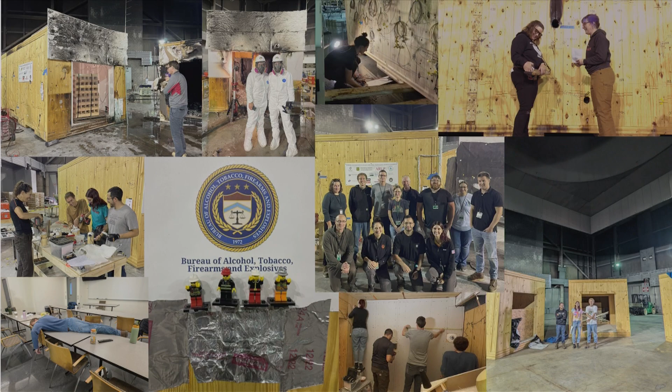So today, what I'm going to do is cover a slew of motivations for this research. How did we get here? Why are we burning these timber compartments down? And what are we trying to learn from there, and what is there to learn in the future? I'm going to talk a little bit about what we know so far in the fire field and how we can build upon that, decades and a century worth of research. And then I'll wrap up with what we did specifically, what we were testing, what we have learned so far, and what we're going to be doing in the future.

And really what the benefits come down to is that a lot of the fabrication for these structural systems, the glulam beams and columns and the cross-laminated timber floors, a lot of this is done off-site. So the fabrication, the milling, all of the cutting for the connections can be done in a shop. And what that does is it removes the work from being done on site. There's no welding, there's no pouring of concrete. And so that expedites the construction process. We're able to build these buildings a little bit faster than we can with steel and concrete.

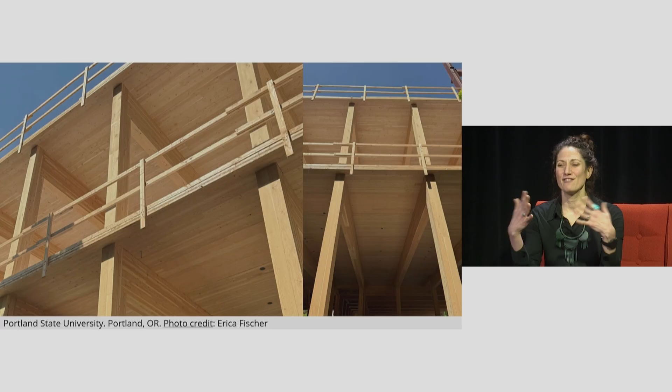While that's great, time is always money. What that comes down to is the building can open faster, we can get rentable occupants in the spaces faster, and the building owner can make money faster. So while we have all these incredible other benefits, it really comes down to the economics.

Mass timber is also a lighter weight material than steel or concrete, so we're able to use smaller foundations for mass timber buildings. We also live in a high seismic region here in the Pacific Northwest, and our earthquake demands are proportional to the weight of our building. So if we have a smaller weight building, we can save cost on our lateral force resisting system. We're able to save costs on speed of construction, size of foundations, and the lateral force resisting system, and build these buildings a lot faster.

This lecture series is all about climate, and we know that using these natural materials is really beneficial to the climate when we look at the full life cycle assessment of these buildings. So we can layer that on top as another benefit for this material.

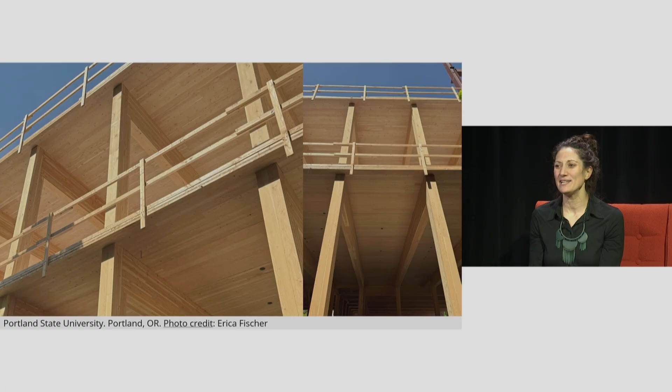With all of that, these materials are really primed to solve some of our major problems in the United States, particularly with housing shortage. We can get these buildings built faster. Everyone wants to be inside of the building with the exposed timber, it's a really great feeling. If you're on campus, you can go over to Peavy Hall and take a look and feel all the biophilia in the building. So there are opportunities to really solve some of our major building problems in the United States.

We can also use advanced manufacturing techniques and robotics to fabricate these members. We're already doing that over in the Emmerson lab here on Oregon State University's campus, using a ton of robotics to precision fabricate a lot of the connections and members, so we don't have to do that work on site and can have less waste in our construction process.

So all of these are amazing benefits, right? It definitely shows that timber and mass timber in general is a viable building product. But we do live in the Pacific Northwest, so a lot of us have gone camping. We know that timber burns for a long period of time. It's a really great fuel. That's why we've used it for centuries.

So what happens when there is a fire within this building? How can we build fire-safe mass timber buildings? How can we have it all exposed, enjoy the Portland International Airport, enjoy these buildings that are cropping up around our state, but also know that if there was a fire, we would be safe? That's what I'm going to talk about today. That's a big challenge that we're trying to solve in our research group.

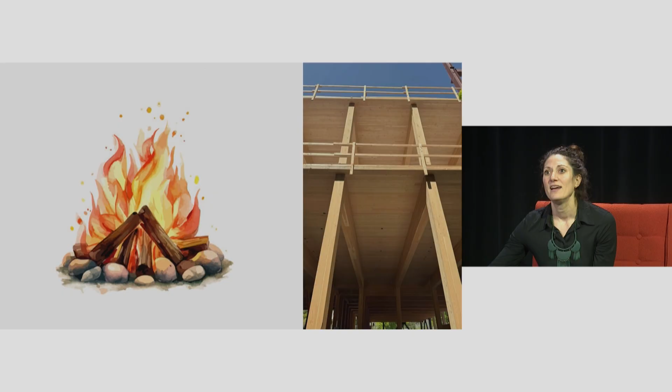So to get into how we're solving this and why, I'm going to first give you a little bit of a fire 101. There are a few different stages of fire, and fire can be characterized by the amount of energy being released, the heat release rate, which I'll talk about later when we discuss the results of our tests. It can also be talked about in terms of gas temperature, the air temperature during the fire.

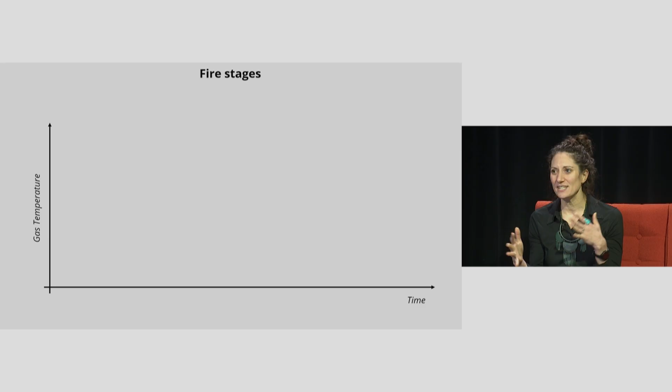So we are all sitting in some sort of office or home, some sort of room. If we decided to take a match and throw it into one of our garbage cans - please don't actually do this, just imagine it - the contents of the garbage can would start to ignite. That ignition might grow, and that fire would then ignite other things in the room, such as the carpet or the curtains or other nearby furniture. As that fire grows, we would have both burning fuel and unburnt fuel in the space.

We would start to develop a smoke layer on top of the ceiling. We would have fresh air coming into the room, and the two would be mixing together. We call that the growth phase.

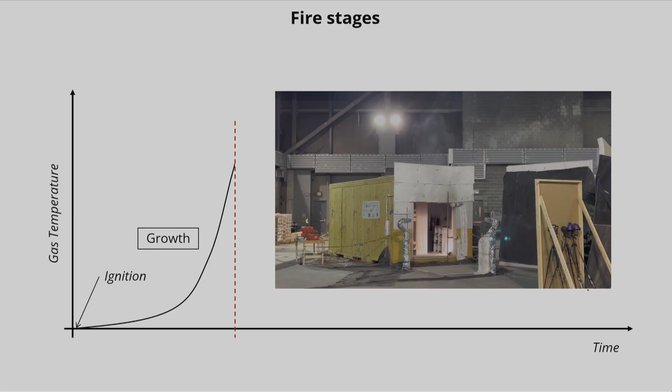And that growth phase can look like what I'm showing on the screen - this is from one of our tests. We can see some smoke coming out of the opening of the room. We can't see the fire itself, but we can begin to see what might happen there. The growth phase could also look like this on the screen, where we see more smoke coming out of this room, but not everything is on fire yet in this space.

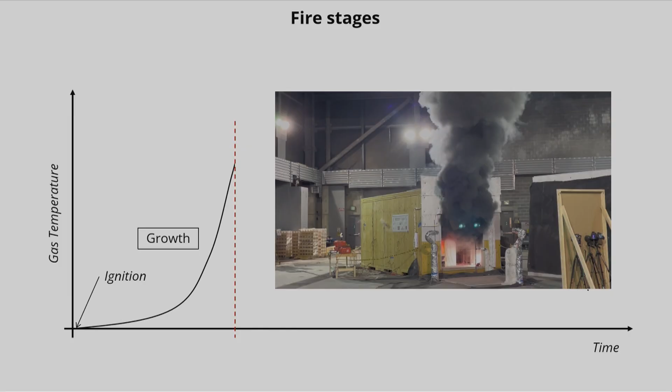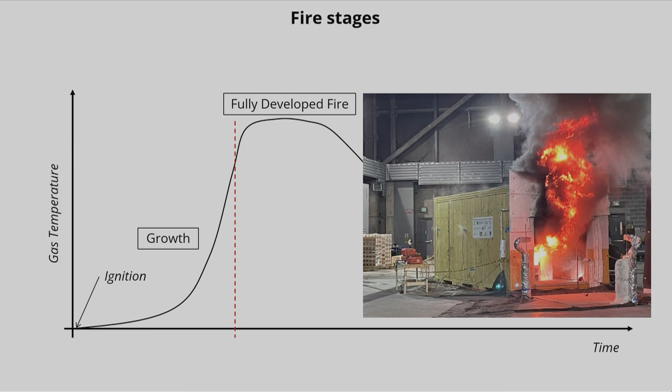After the growth phase, when everything in the room is on fire, when we have ignited all the fuel in the room, we call that a fully developed fire. That might look like something like this, where we have flames actually coming out of the room. We see that almost everything in the room has combusted or is actively combusting.

Before that fully developed fire, we call that pre-flashover, and after it, we call that post-flashover. The research that I do is really in that post-flashover phase. We are not looking at evacuation of occupants, and we're not looking at the effectiveness of sprinklers on the fire itself. Those are not factors to consider in a post-flashover environment, because it's not suitable for humans to survive, evacuation needed to already take place, and sprinklers are not going to be able to help you in a post-flashover environment.

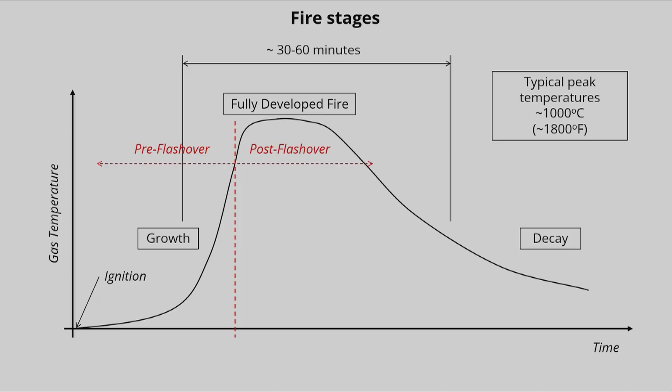That's the different phases of the fire, but we have to also realize that at some point the fuel will be consumed or the oxygen will be consumed. So we go back to our Scout days, thinking about the combustion triangle: we need ignition, we need oxygen, we need fuel. If we don't have all three, we don't have combustion. So when we lose that ventilation or we lose that fuel, we hit the decay phase of the fire. The temperatures begin to decrease, the energy in the room begins to decrease, and our hope is that we're able to maintain the stability of the building throughout this entire curve, and maintain our compartmentation.

I'm sitting here in a room with Charlotte and some other people. If there was a fire in this room, we hope that none of the walls would fall down so that the fire would spread across the fourth floor, and we hope that the floor wouldn't collapse so that the fire would spread downward through the building. We maintain the fire in that space because eventually the fuel will run out, the ventilation will run out, and we hit that decay phase and the fire is over.

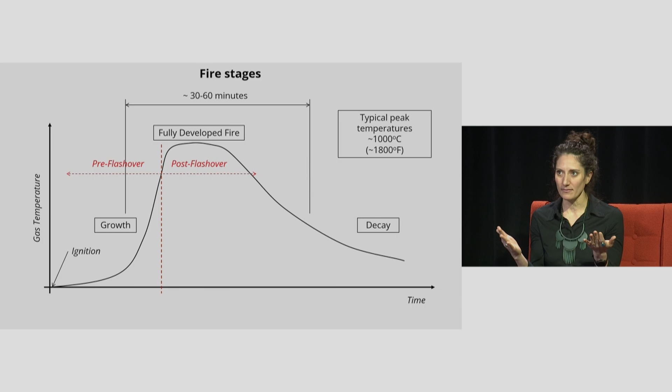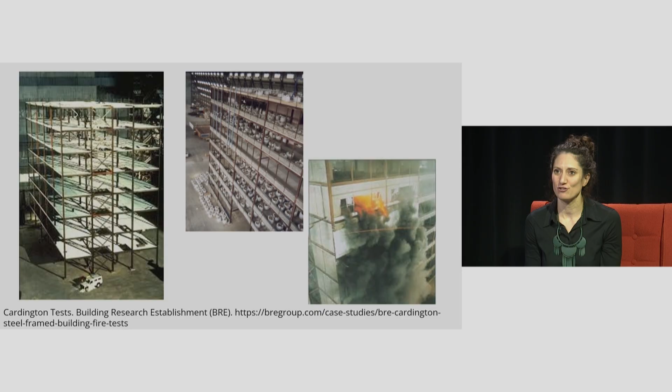So much of the knowledge that we know about fire in buildings is about a century old. At the end of the 90s in the UK, the Building Research Establishment built a eight-story steel frame structure in the middle of a big airport hangar. They put known fuel in various areas of the building, built out the compartments in different areas, and lit them on fire.

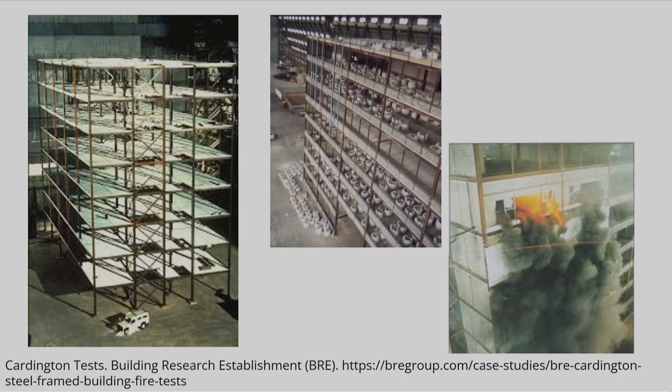That enabled us to quantify the fuel within the space, measure the fire demand that resulted within that space, and hone in our tools to be able to quantify what the fire might be in different types of rooms with different types of ventilation and different types of fuel.

It also enabled the research community to really understand the structural response to those fires. We learned and got to quantify the large plastic deformations that we saw in steel beams and girders, as you can see on the lower right. That showed us there was membrane action of the slab, that this was a two-way problem, a three-dimensional problem, such that the entire structure was involved in maintaining that stability during the fire.

We saw that there might be some damage in the connections, such as local buckling or bolt fractures, but we didn't really see collapse or failure. That showed us the robustness that the steel frame building really had.

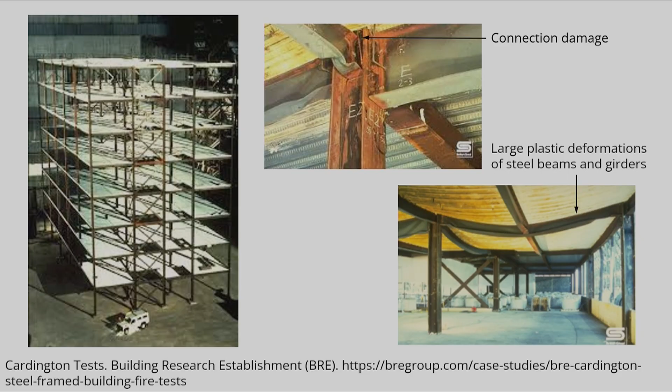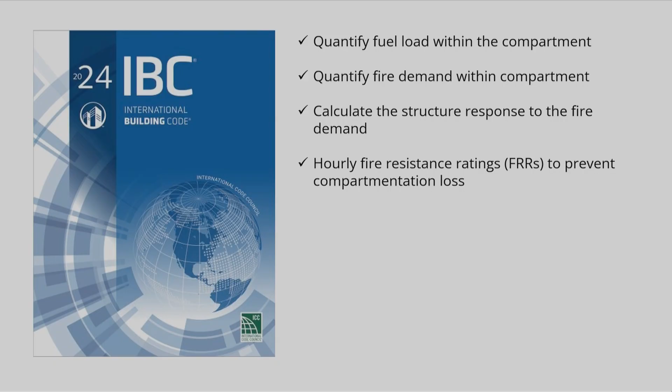So researchers were able to quantify the fire demand in the space, then perform heat transfer analysis and understand through sensors and numerical modeling the thermal distributions through the members, and then use those temperatures to understand structural performance. A lot of that fed into us feeling okay with the hourly fire resistance ratings within the International Building Code, and it also enabled us to pull together a performance-based design code for fire.

The work out of the Cardington test inspired research all through the early 2000s, including my own PhD research, which was stimulated after the collapse of the World Trade Centers. Between that research in the United States and the Cardington research in Europe, we were able to pull together and really understand the performance of steel frame structures in fire, and be able to perform that performance-based design.

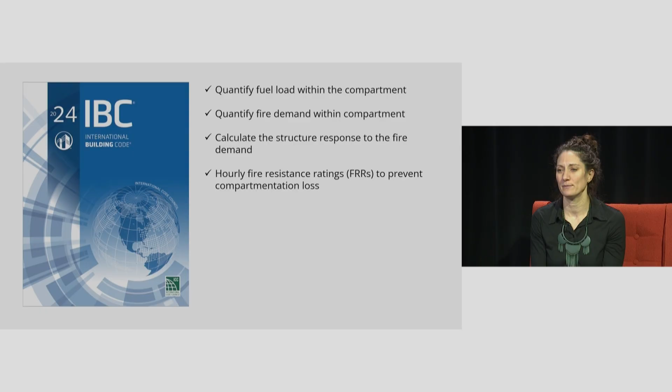But this is all for non-combustible components. Now let's go back to our Portland International Airport. This is not non-combustible components, this is combustible. So what happens now in a space where we have combustible building components? Can we take the decades and a century worth of knowledge on fire behavior and just apply it to this space? Or do we need to tweak and understand the knowledge we already have to adapt it to consider the combustibility of the timber in this space?

One thing that we learned from the Cardington test and from decades of research before and after is that steel wants to expand during the heating phase of the fire and contract during the cooling phase. It can't actually do that in buildings.

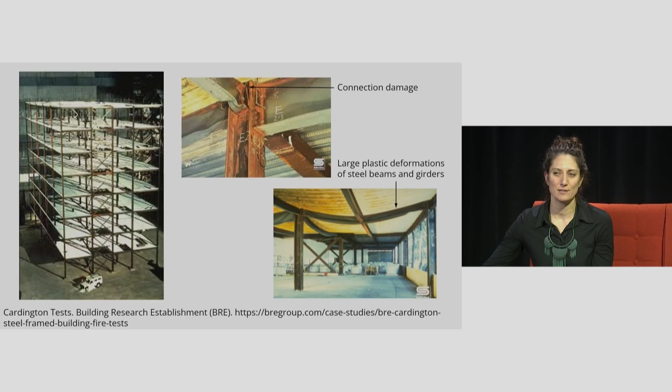That's why you see all of that local buckling, because of that restraint you have thermally induced forces in our steel framed structures, but we don't have that in timber. Timber doesn't want to expand during a fire or contract during cooling. Rather, the timber is charring during the fire. Very quickly we'll see a char layer form on the outer surface of that timber, but it's not just about the charring.

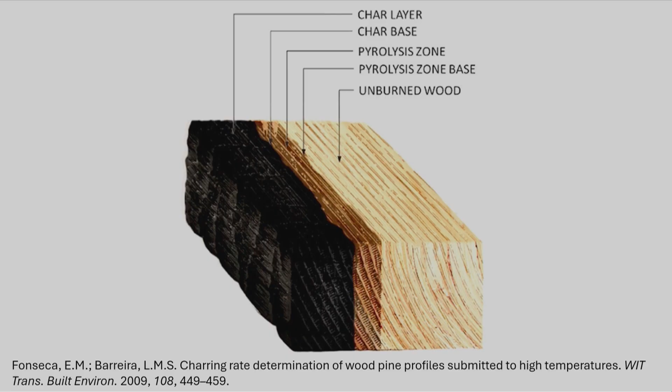Beyond that charring, in that brown zone you'll see on the screen, it's what we call the pyrolysis zone - we have what's called a heat affected area. When the timber is between around 50 and 300 degrees Celsius, its thermal and mechanical properties are degrading quite quickly with temperature. So we need to account for that when modeling this structurally in a building. We have our char layer, we have an area beyond that char that has heated up, and this is all happening as a function of time throughout the fire duration.

Let's go back to our compartment. In a pre-flashover phase - I explained this a little already, but the picture helps - when we have this burning fuel, it's having a heat transfer reaction with the smoke layer, but also with the unburnt fuel. You'll have some radiative heat transfer between the burning fuel and the unburnt fuel, and some convection and mixing between the fresh air coming into the compartment and that smoke layer up there.

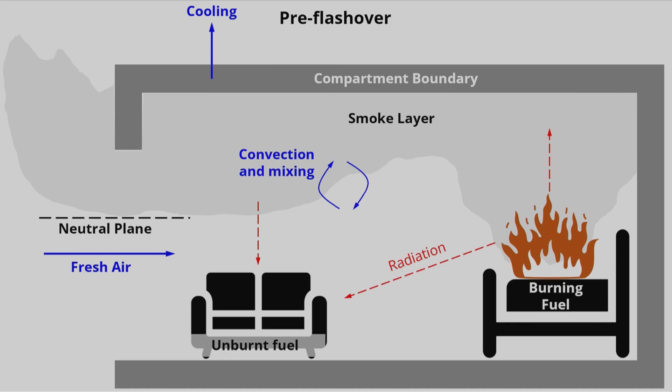We're also going to have thermal gradients throughout our compartment boundary, where the part not in contact with the fire, the outer part, is much cooler than the inside. Equilibrium is trying to be met, so the heat keeps going through the compartment boundary - we call that a thermal wave. In our post-flashover environment, we're going to have flames spilling out of the compartment. We have less fresh air coming in because the smoke layer is descending, but we'll still have heat flux coming down from our smoke layer to our burning fuel.

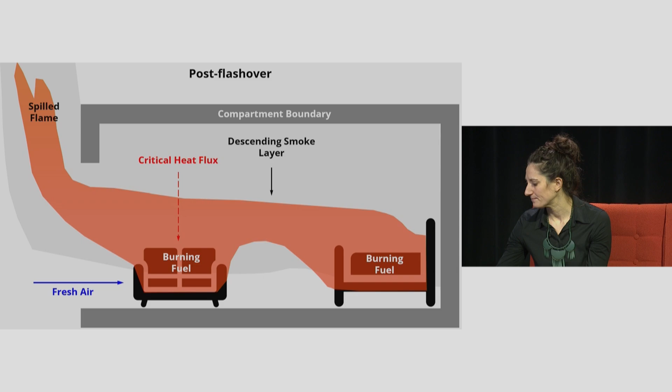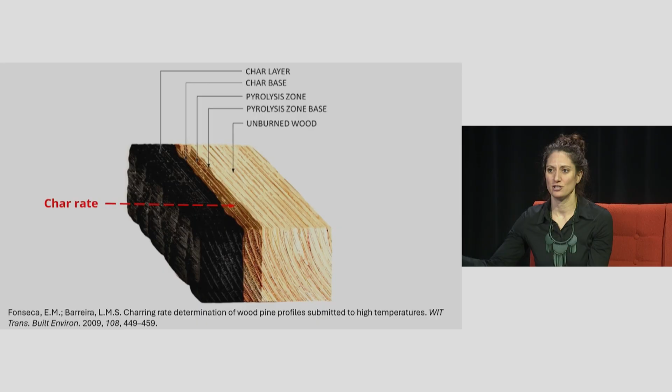If we look at what's happening in the compartment boundary, this is exactly what's happening, except we're going to be charring the timber as it goes through - but this is not going to be linear. Timber chars, and that char layer is actually a really great thermal insulator for the uncharred wood, so as the char propagates through the uncharred wood, it's not doing so in a linear manner.

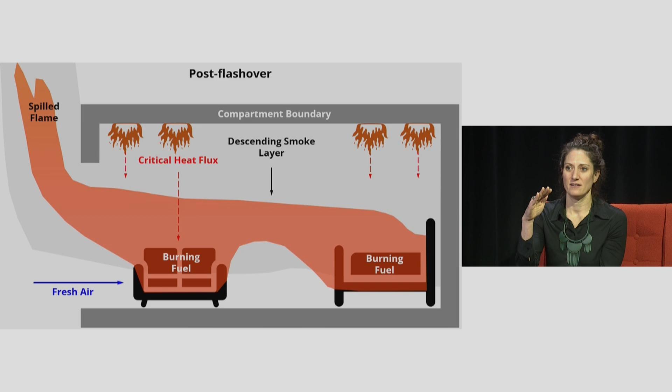Now if that compartment boundary is timber and exposed, meaning it doesn't have gypsum wallboard or other fire protection, that timber will ignite and also contribute to the fire itself. That timber will be considered part of that burning fuel, and there will be radiative heat transfer reactions between the burning fuel and the compartment boundary that is on fire - we call that irradiation. So the two will cause the temperatures in the compartment to rise.

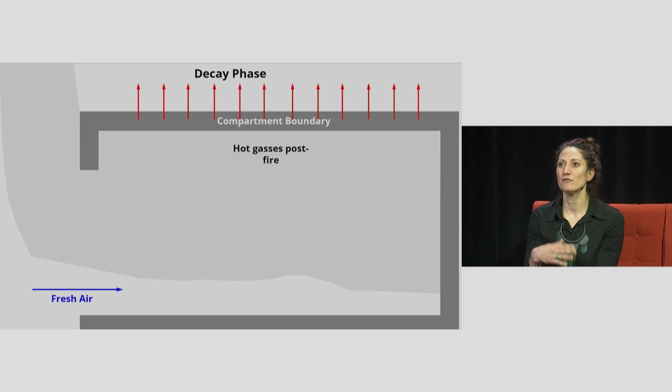So we know what happens during the pre-flashover and post-flashover phases, but the decay phase is really critical because that thermal wave is continuing to go through the compartment boundary. Some researchers say the timber might continue to char during the decay phase, and that might be true. But more importantly, the timber will continue to increase in temperature, resulting in degrading material properties and degrading structural capacity. So as the fire decays and gas temperatures decrease, we are still heating up portions of the timber in the compartment boundary and reducing its mechanical properties.

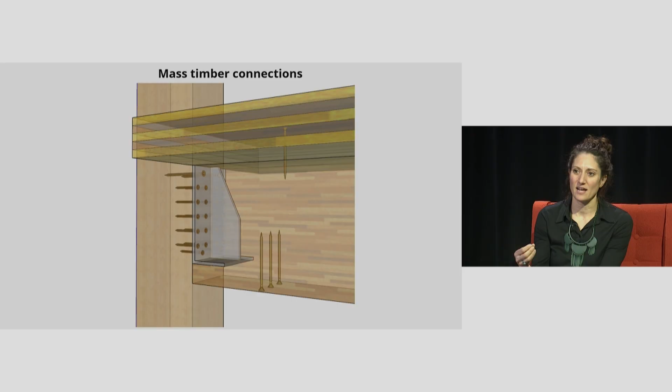Now, this will be one of my only mentions of mass timber connections, but all of this becomes even more complicated when we talk about mass timber connections because we are mixing the materials together. We're performing heat transfer not just through the timber itself, but through steel into timber. There's an opportunity to conduct heat up into the timber through those screws - not all the way through the depth of the screw, but definitely along the screw itself. In addition, we're exposing multiple edges of the timber to the fire, and each side will char at a different rate.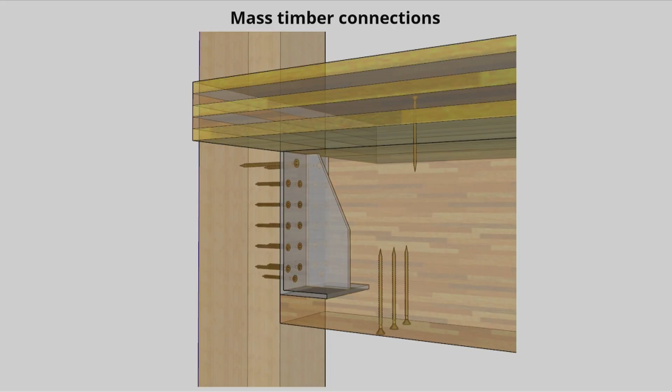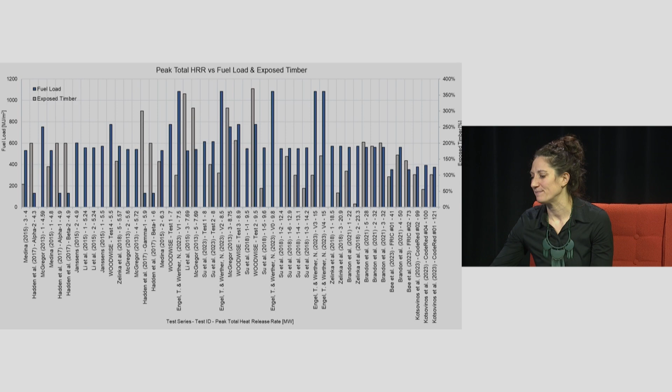Okay, so now that you are all experts in fire dynamics and you understand why we're doing what we're doing and all of the complexities of this problem, let's talk about what problem we specifically are trying to solve in our research. So we did a number of compartment fire tests at the Alcohol, Tobacco, and Firearms Laboratory.

And what I'm putting here is almost all the other engineers and scientists around the world who have also performed these tests. Our tests are sprinkled throughout here. The left side of the y-axis is the fuel load, and the right side of the y-axis is the exposed timber as a percentage of the floor area.

And what I'm trying to show you here is that a lot of the tests fall into a very singular bar that kind of are below that 600 megajoules per meter squared. Not a lot of tests have a lot of exposed timber above 200% of the floor area, and not a lot of tests use large amounts of fuel load.

And the reason that's important is going back to our compartment fire figures. When you have exposed timber, you could be exacerbating the fire itself. And if you have a high fuel load, that could be even worse.

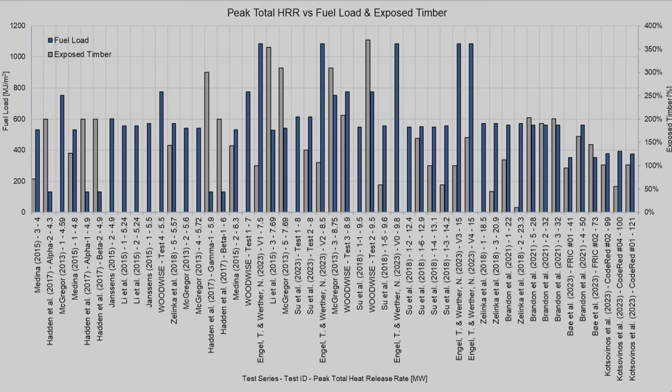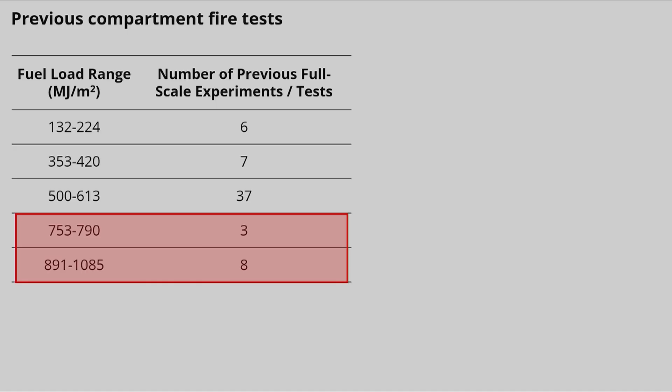So if we break this down into a table, what we see is that actually very few of these tests fall into that high fuel load area. And the majority of those tests, and almost all of those tests, don't use actual modern furniture.

And the reason for that is, modern furniture, when you burn, is expensive. But the result is that the dynamics of the fire itself may not represent what might occur in real buildings today. By using wood as proxies for furniture, we are changing the composition of our fuel.

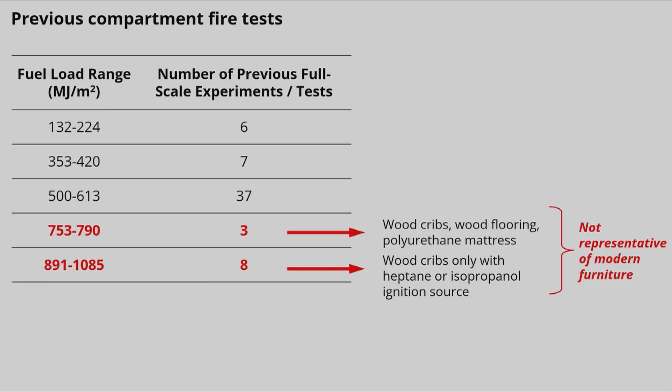We're substituting cellulose-based fuel for synthetic fuel. Wood burns very slowly, for a very long time, versus the type of chair I'm sitting on right now, which might ignite very quickly and not burn for very long. It might be completely burned in a short period of time.

And if we extrapolate that to an entire room or entire building filled with furniture, that would change the dynamics of the fire quite a bit.

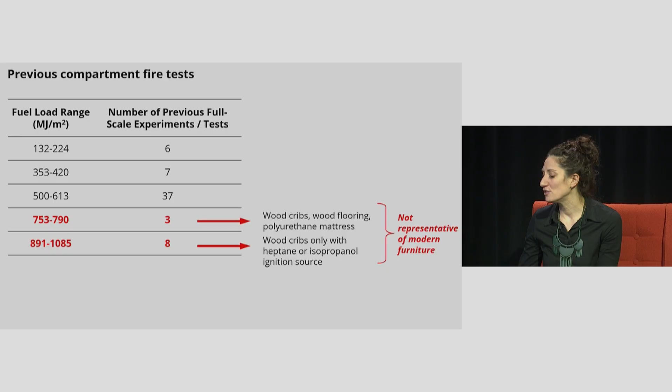So what we aim to do is really get at how do we holistically evaluate mass timber buildings in fire, considering all of the performance objectives that we need to put onto our buildings, which is becoming more and more every day. It's really hard to juggle these performance objectives.

But in order to get to fire-safe mass timber buildings, we need to be able to actually quantify and calculate the fire demand that is within these buildings. That's going to depend on our building occupancy, the geometry of our compartment or our rooms, and it's going to 100% depend on our fuel characteristics and the thermal properties within the space.

When we can actually quantify what the fire hazard is in the space, we can then perform our heat transfer models. We can then understand how quickly we are charring the wood, how quickly we are moving that thermal wave through the timber, and then degrading those structural and material properties.

And relate that to our structural capacity in our structural model, so we're able to actually calculate what the structural capacity of our members and our building is during different fire scenarios. We have to first and foremost be able to quantify what that fire scenario is.

And then we can couple it with our sustainability and emissions practices. Typically, when we do a life cycle analysis of a building, we're looking at the global warming potential of the materials, or we're looking at the carbon content of the materials.

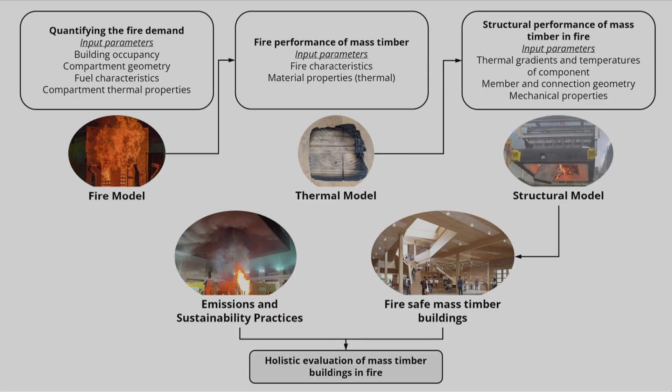It might off-gas, and it might emit worse products. We don't know. So we have to consider all of that within our holistic evaluation of our mass timber buildings to be able to make informed decisions about which way to go.

So with that, I'm going to talk about the bulk of what we did. We tested four compartments across three different buildings. Tests 1 and 4 consisted of the same building, and we fully encapsulated that building. Gypsum wallboard was on every single surface of the interior of the structure, so the timber was not damaged. Test 2 consisted of every surface being exposed.

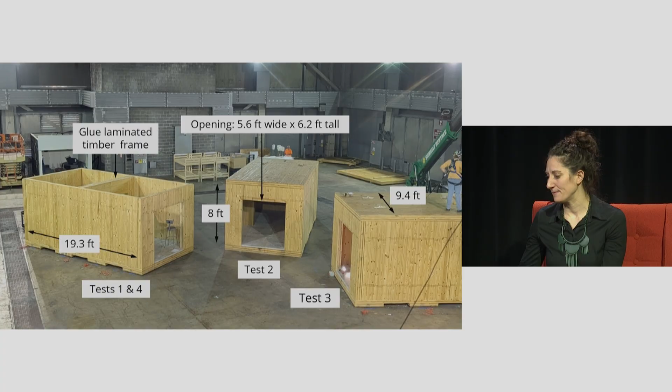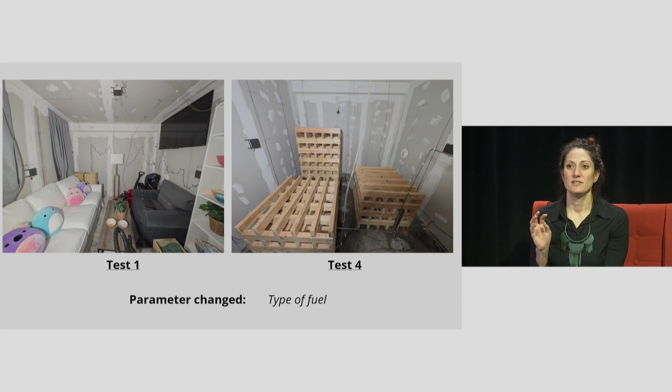Tests 1 and 4 were exactly the same. The only parameter that changed between these two is the fuel. We tested test number 1 with furniture and modern fuels. For test number 4, we used wooden cribs that would equate to the same fuel load, and we tried to place the wooden cribs in areas where we had the fuel in test number 1.

We didn't know how controversial the squishmallow burnings would be at the beginning of these tests, so I apologize to everyone with kids who is watching this at home.

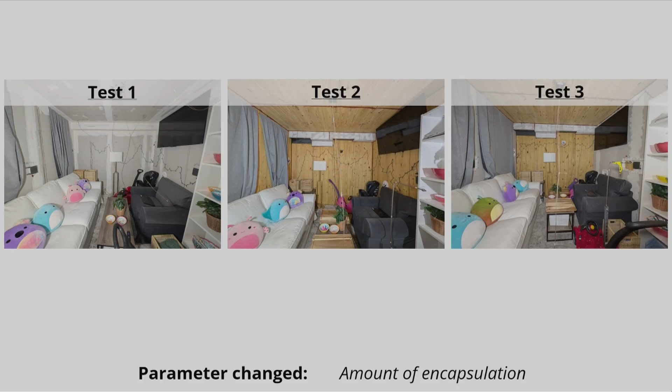For tests number 1, 2, and 3, those had the exact same furniture in every single test in the exact same location. The only thing that changed between tests 1, 2, and 3 was the amount of encapsulation. Test 1 on the left had full encapsulation, gypsum wallboard on every single surface. Test 2 had no encapsulation, and test 3 only had it on those long longitudinal walls.

Now you'll probably see something in the back corner between the back wall and the ceiling. Those are different connections that we tested within our compartment to look at how different connection configurations and the amount of fire protection on these connections might perform in a natural fire environment. I'm not going to talk about that today as there's not enough time to cover all of it.

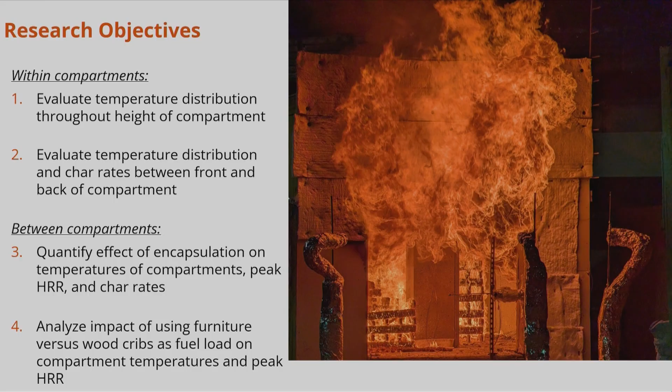So what were some of our research objectives? When we were looking within each compartment, we wanted to know what the temperature distribution was from floor to ceiling. Was it fairly uniform, or were there big differences in that vertical temperature distribution? We also wanted to know the temperature differences between the front and back of the compartment. We had that glulam frame in the middle of the compartment, and we were curious how that affected the fire itself.

When comparing between the compartments, we wanted to look at the effect of encapsulation on temperatures, on char rates, and on heat release rate, the energy being released by the fire. Lastly, we wanted to know the effect of using furniture versus wood cribs on all of these factors. There's a lot of research throughout the world using wood cribs, but our current furniture isn't really cellulose-based anymore, it's synthetic. So we wanted to test whether we could extrapolate results from those tests to modern fuel loads and fuel environments.

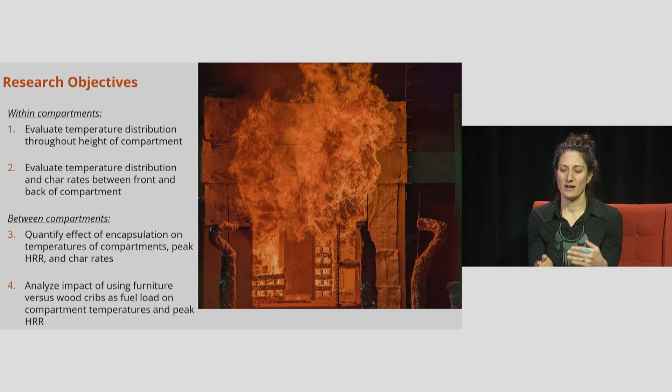We had about 800 instruments throughout the entire compartment, and there isn't enough time left in this lecture to go through all of it, so I'm just going to go through some of that here.

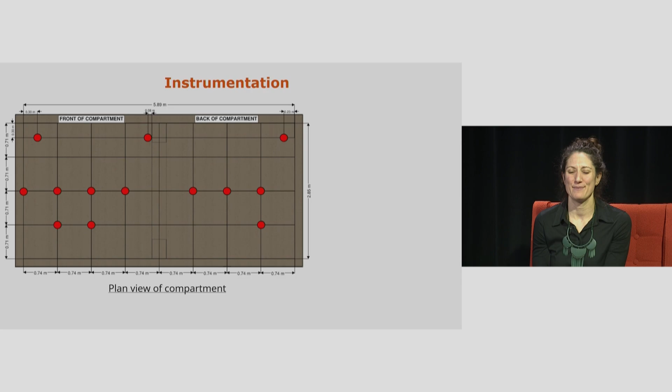All of these red dots represent a plan view of the compartment, showing what we call thermocouple trees. These are strings that we dropped from the ceiling to the floor, with thermocouples placed about 0.6 meters, or about 2 feet, apart from ceiling to floor. This allows us to collect a thermal distribution throughout the compartment, from front to back and from floor to ceiling.

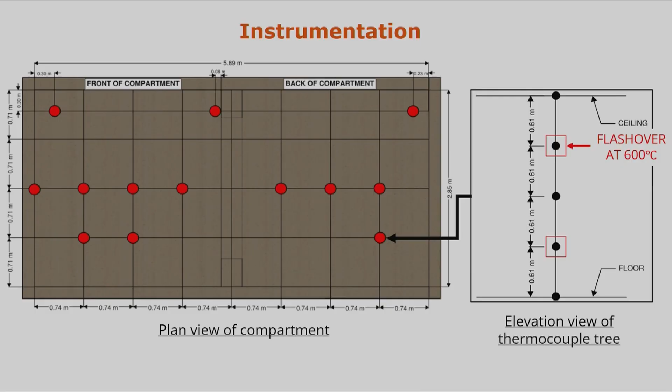We used the thermocouple that was 0.6 meters below the ceiling. When that thermocouple reached 600 degrees Celsius, we said that meant we had reached flashover. So we can actually quantify that flashover point to differentiate between pre-flashover and post-flashover.

All right, so we're ready for some results.

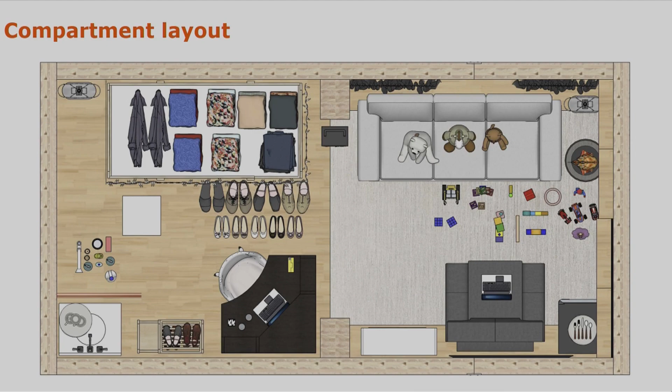In every single test, we put the ignition in this location: the back left corner of the compartment, in the couch. We ignited in the same way every single time, even with wood cribs.

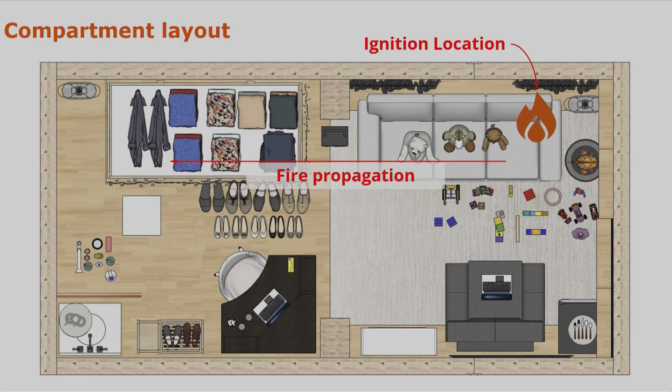The fire ended up spreading and igniting around the back of the compartment, and then it moved to the front, and then it moved back to the back. We know this because we had cameras in the space and could see it before the cameras burned. It's hard to do fire testing because of the harsh environment. We can also see this in our data, and I'm going to go through a bunch of it with you and show you exactly how. It really helps to pull the data all together.

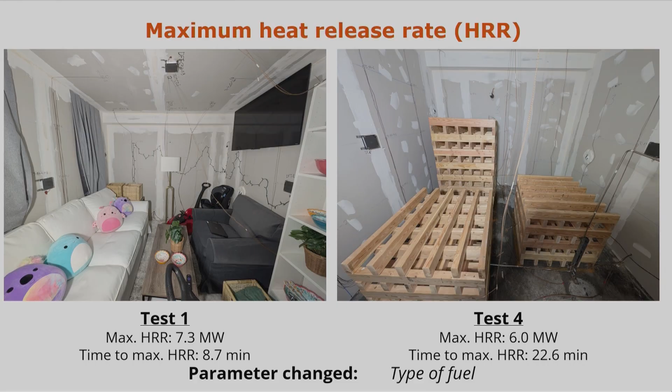If we compare test 1 to test 4, just in our maximum heat release rate, the maximum amount of energy being released by this fire, we can see that the maximum heat release rate decreased when we went from modern fuels to wood cribs. But more importantly, the time to that maximum heat release rate increased by about a factor of 3 when we went from modern fuels to wooden cribs. Wood burns for a really long time and burns slowly, and that was really reflected in our time to maximum heat release rate. We can see it show up in the data.

When we go from test 1 to test 2 to test 3, adding that encapsulation, we see that as we add more encapsulation, we increase our maximum heat release rate. When we go from test 1 to test 2, we actually decrease the time to the maximum heat release rate, so we get there very quickly. But more interestingly, when we add encapsulation on those longitudinal walls, we decrease our maximum heat release rate just a little bit because we're also decreasing the amount of fuel, but we get there faster, which is really interesting. That's going to come up in some of the other data we're going to look at.

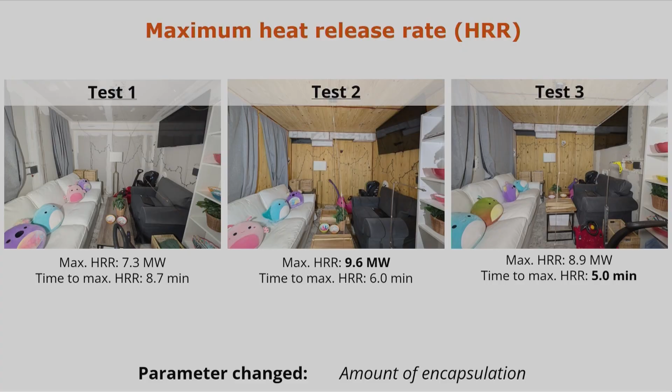So I'm about to show you some plots, don't be too overwhelmed, I'm going to walk you through them. What I'm showing here are temperatures. The gray is 0.6 meters below the ceiling, the hatching is 0.6 meters above the floor. On the left is test 1, on the right is test 4. Test 1 has furniture and modern fuels, test 4 has wood cribs. This is just for the front of the compartment. There's a little cartoon in the upper right-hand corner that tells us if we're looking at the front or the back. Right off the bat, in test number 1 we had a shorter time to flashover.

That kind of reflects our time to maximum heat release rate. The x-axes in these plots are different because we had to cut test 1 short, the encapsulation failed because of an installation snafu. The bigger difference is that the temperatures were actually a little bit higher in test 4 than in test 1. It took longer for test number 4 to reach its peak heat release rate, so it had more time in that burning and combustion phase leading to the peak, and that resulted in higher temperatures in the front of the compartment.

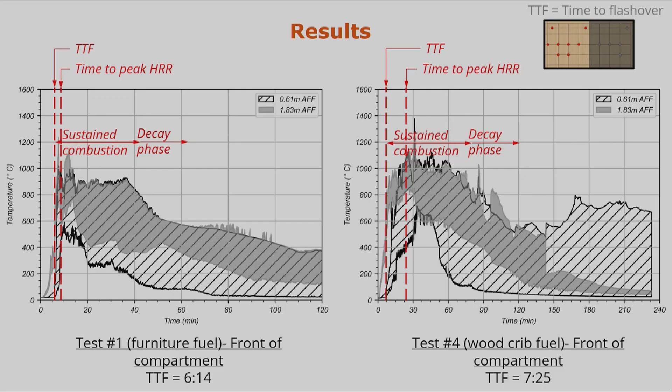Let's put some lines on here. What we can see is that our time to flashover and time to peak heat release rate are very close to one another in test number 1, followed by a decay phase. But in test number 4, we had more differentiation between our time to flashover and time to peak heat release rate, kind of a longer sustained combustion, and then we hit a decay phase. In the back of the compartment, the ignition is in the back of the compartment.

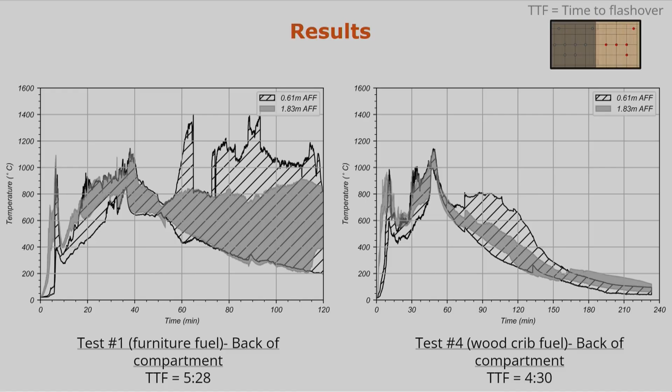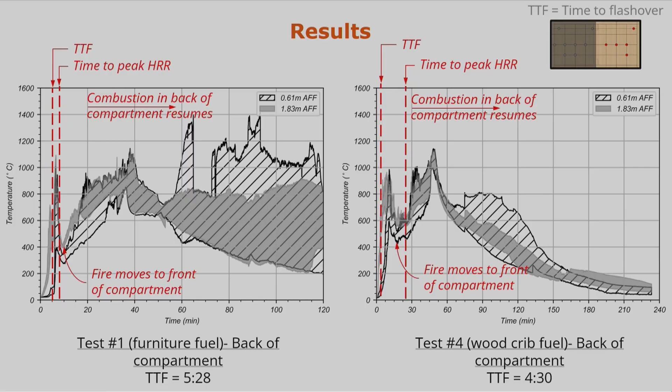Just as a reminder, we see these spikes followed by a decrease in temperature. We hit flashover, and then the fire actually moves to the front of the compartment, and combustion occurs there. Finally, there's enough oxygen for the back of the compartment to continue combustion, and the fire moves back and combusts there. So we can discern what's going on with the fire movement in the space from all of our data. However, in the back of the compartment, we actually see our time to flashover with the wood cribs as faster in test number 4 than test number 1, and that's the opposite in the front of the compartment.

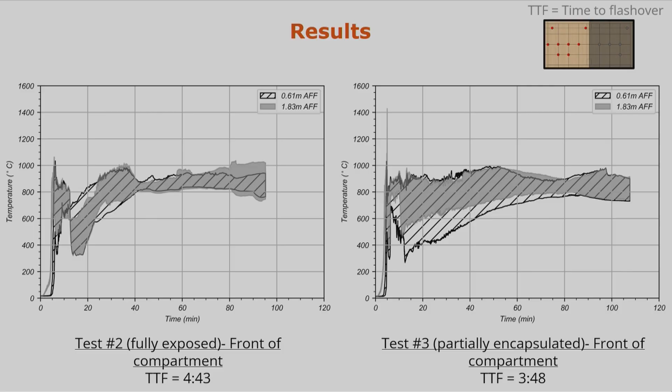So if we begin to compare test 2 and 3, as a reminder, both had modern fuels. Test number 2 was fully exposed, test number 3 was partially encapsulated. What we see is test number 3 has a faster time to flashover. It had a faster time to peak heat release rate as well, and we can see that in our lines. In both cases, that time to flashover and time to peak heat release rate are very close to one another, but then we just have sustained combustion because the CLT is burning.

We've burned all the fuel in the compartment and the CLT began to burn. Both tests never hit a decay phase, and we had to actually cut the tests short because the compartment was about to collapse in both cases.

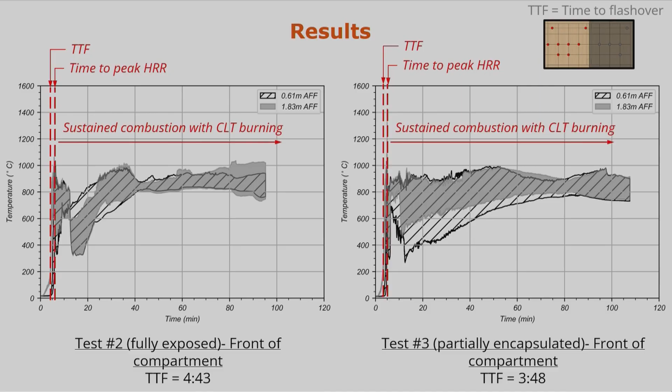So this is for the front of the compartment. In the back of the compartment, we begin to see very similar behavior to test 1 and test 4, where we see those spikes with our time to flashover and peak heat release rate. We then have a decrease in temperature as the fire moves to the front of the compartment, and the fire comes back to the back. We have sustained combustion until we stop the test. Very consistently with the front of the compartments, test number 3 has a lower time to flashover by about a minute than test number 2.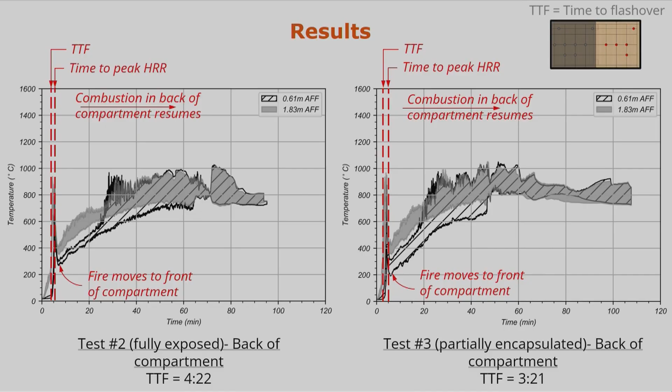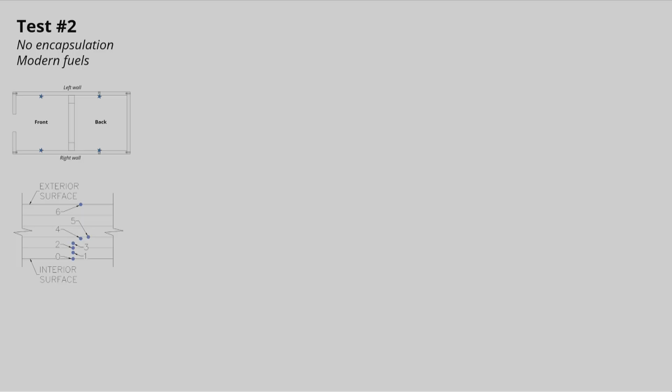The last part we'll compare are the char rates between test 2 and test 3. We'll start with test 2 and look at some plots first. If we focus only on the front of the compartment, the red line is the gas temperature closest to the wall we're looking at. Focus on these dotted lines, they all shoot up, and as we move along in the plot, the slope changes. Each of those lines corresponds to a thermocouple, a temperature sensor embedded in the CLT wall.

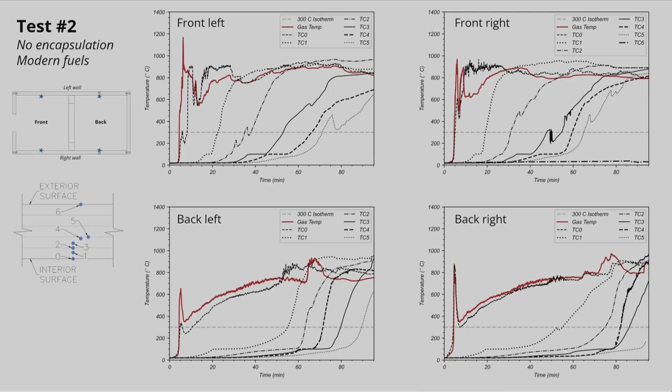Back at the beginning, we talked about char rates and how it's not linear. You can see it in these plots here, that we are not charring the timber in a linear fashion as we move through that depth of the wall, and we can see that in the back of the compartment too. But here we see that spike in temperature, like in our previous plots, then the decrease because the fire moves to the front. Then when combustion begins back at the back of the compartment, we begin to see the charring of the wood. So we see this delayed charring between the front and the back, which is really interesting and tells us more about the fire dynamics within the space.

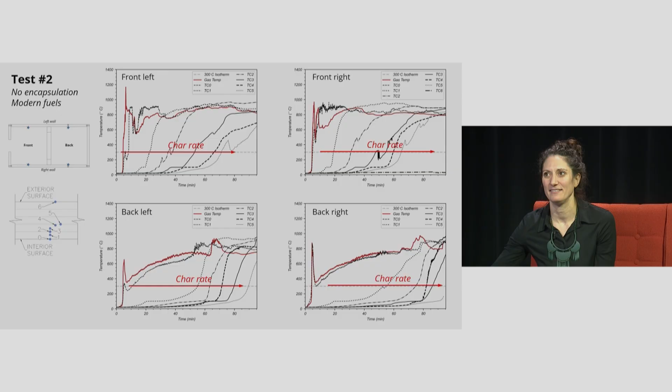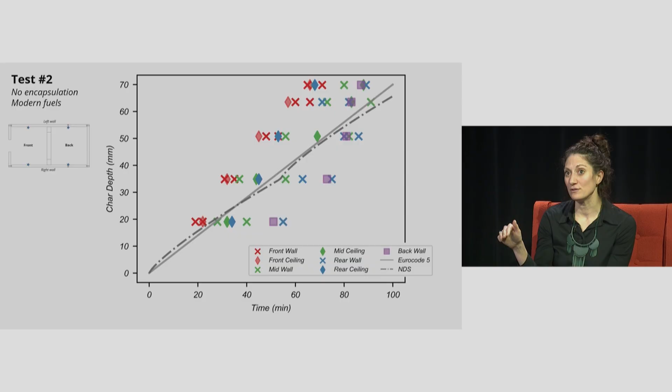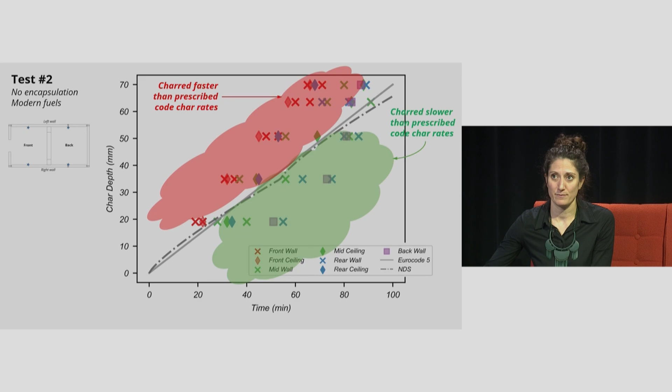So we can see the char rates there. We can plot this in a different way, looking at char depth versus time through all of the members in test number 2: the back wall, the ceilings, the front wall, the side walls, all of them. Those lines are the char rates from our codes, within the United States as well as in Europe. The dots below these lines are char rates slower than the prescribed code char rates, and those tend to be in the back of the compartment. The dots above the line are char rates faster than our prescribed char rates, and those are in the front of the compartment. So this is just another way of visualizing the data to show that we were combusting in the front much faster than in the back.

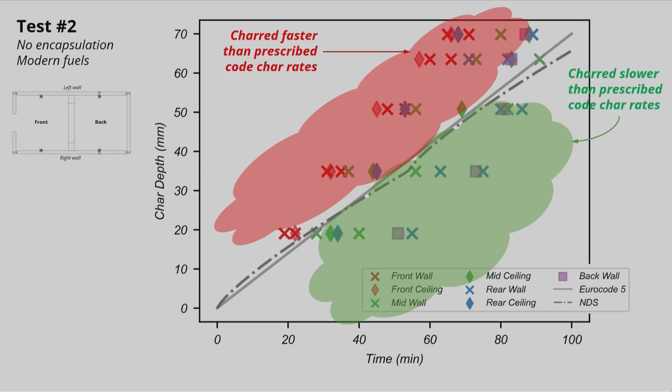When we look at test number 3 with our partial encapsulation, we can see the same thing.

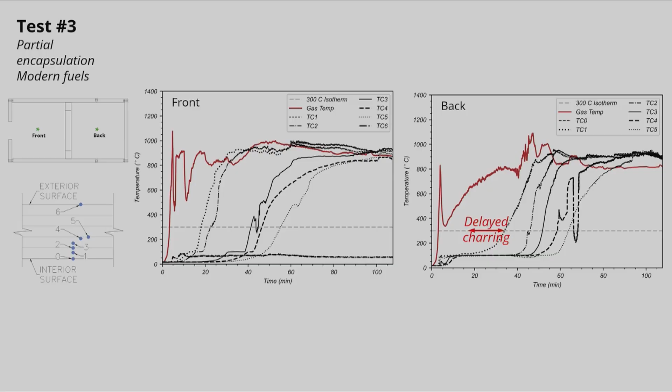These are just the ceilings. What we can see here is again that delayed charring from the front of the compartment to the back of the compartment. We can see the change in slopes, as well as the spacing between the lines themselves, so we're not charring in a linear fashion.

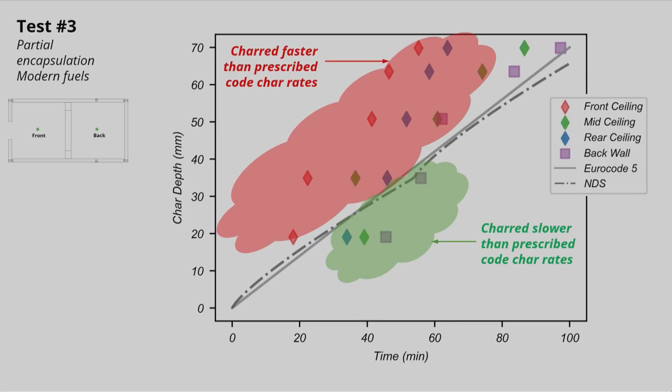We see that in our plots here. This is our char depth along the vertical axis versus time, where our charring is slower, with very few points slower than our code-prescribed char rates, and a lot of points going faster than our code-prescribed char rates.

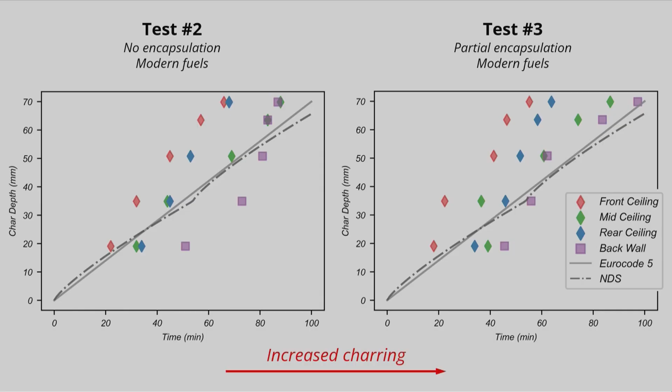When we compare them to one another, we see a lot more nonlinearity in test number 3 than in test number 2. We saw these different fires that resulted in these two compartments just by adding that encapsulation on the longitudinal walls. There's increased charring in test number 3 compared to test number 2, even though the maximum heat release rate in test number 2 was a little bit higher.

So wrapping up, what are some of our conclusions? When we look at the effect of fuel composition, we see that it has a huge impact on the fire dynamics within the space. We see a little bit higher temperatures, but actually lower peak heat release rates and much longer times to those peak heat release rates. So using these wooden cribs might inform information about fire dynamics in general, but it cannot be extrapolated to real building scenarios.

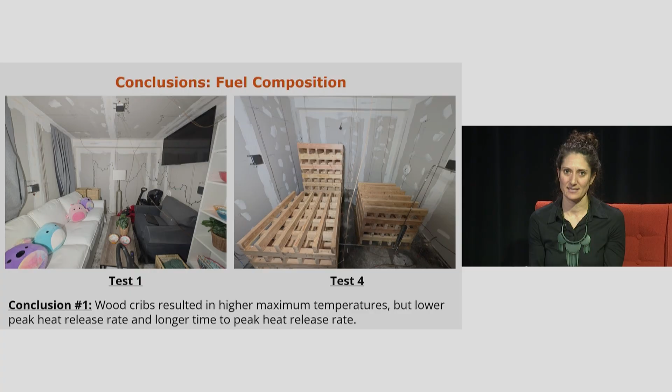When we look at the effect of encapsulation, we see it didn't have a big effect on the maximum temperatures, but it did affect the maximum heat release rate, the time to reach that maximum heat release rate, the time to flashover, as well as the char rate. Adding those encapsulation layers really changed the fire within the space because we're beginning to cover up some of the fuel, which is the timber itself.

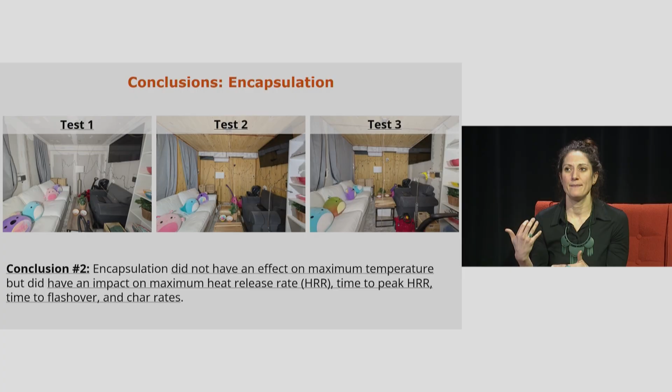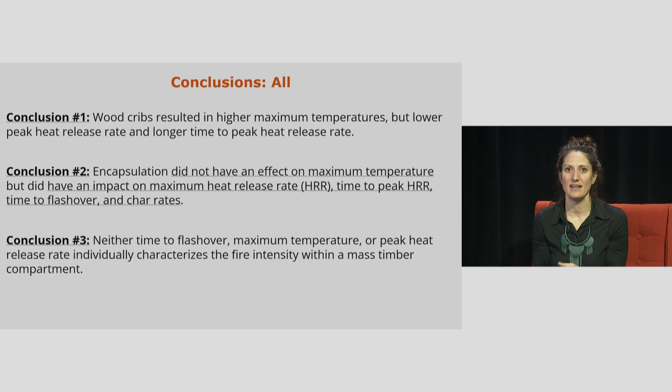Our last conclusion is really that no single one of these parameters can define the fire itself. We can't define the fire just by time to flashover, or maximum temperature, or peak heat release rate. We have to look at all of this together to really understand what's happening in the fire dynamics within that space. So where are we going with all of this next?

We are going to continue crunching a lot of our data and validating our numerical models, to be able to simulate that fire within a mass timber space, so we can perform heat transfer analyses on our timber products and elements, and then perform structural analysis.

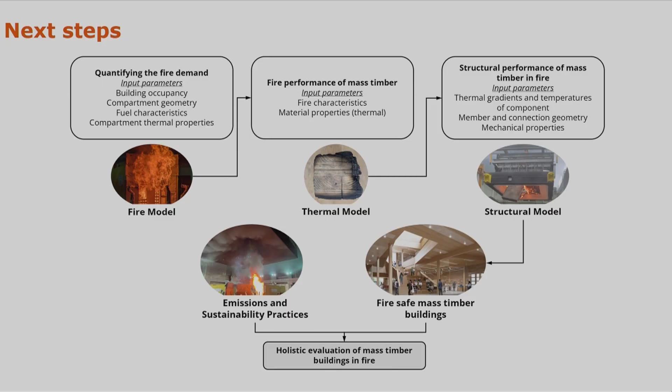We are still working on crunching the data from our emissions, so that we can pull this together into a life cycle assessment of mass timber buildings, considering both fire and the emissions from those fires.